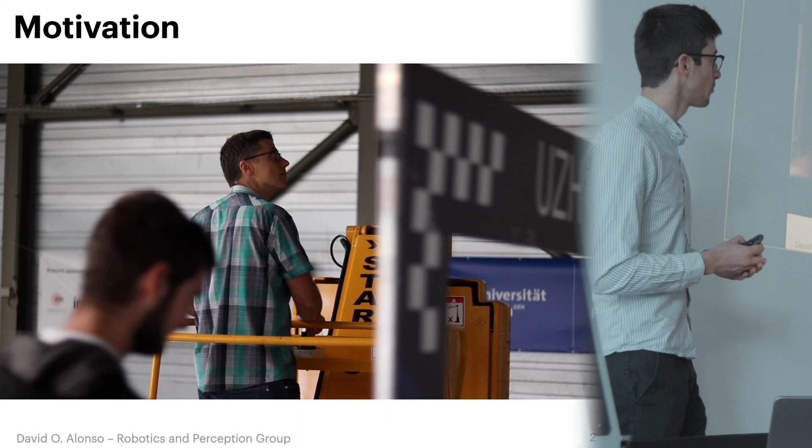Thank you. So yeah, welcome everybody to my presentation on collaborative aerial transport using deep reinforcement learning. So I want to start with a little video. This was a video I recorded about 3 weeks into my project. I had the privilege of going to one of these test days in the flying arena where I saw the policy from Yunlong, the deep reinforcement learning agent, in action against Marvin.

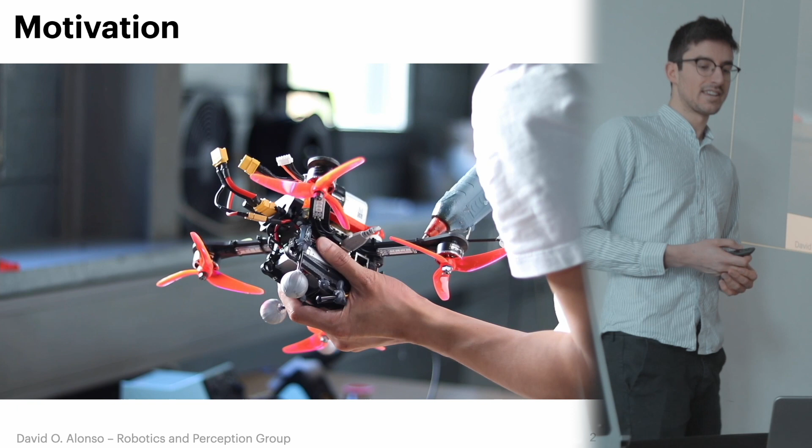And it was really an inspirational moment for me that put a seed into my mind for the vision of my project. And this vision was to take this agility that you see here in this drone, driven by reinforcement learning, and put it into a system where this drone would not only be flying by itself, but it would be collaborating with other drones and carrying a payload.

So you might think that this vision is cool, but what are some other advantages of a team of aerial robots? Well, a team of aerial robots can provide more controllability and maneuverability, so you're able to control the 6 degrees of freedom of a payload with more flexibility and have more configurations. It's also more robust to failure of one of the quadrotors, and it's more efficient.

So if, for instance, you're a delivery company, you don't have to size every flying platform for different types of payload, but you can have a single flying platform and just change the configuration to carry different types of payload with different masses. So these properties are really useful in applications such as delivery, but also search and rescue or construction.

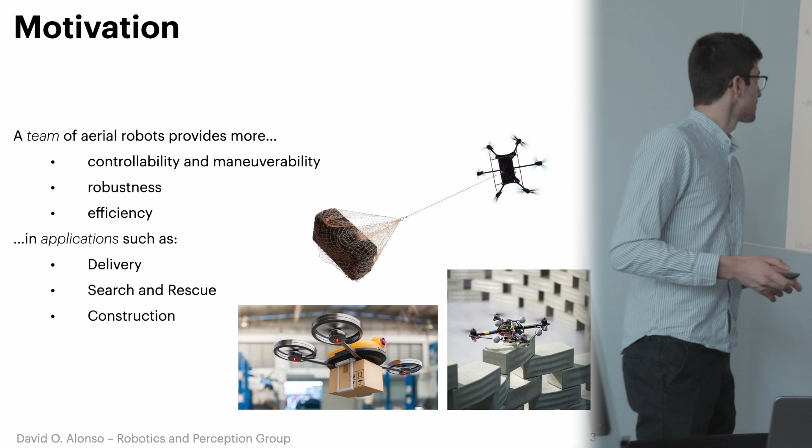But it also comes with some challenges. Collaboration of any kind, such as what you see here in the DARPA challenge, is very challenging. It requires sensor fusion, not only across the sensors within one vehicle, but of sensors across vehicles. It requires communication between either the different agents and a central unit, or between the agents themselves, and coordination as well, so planning for different agents.

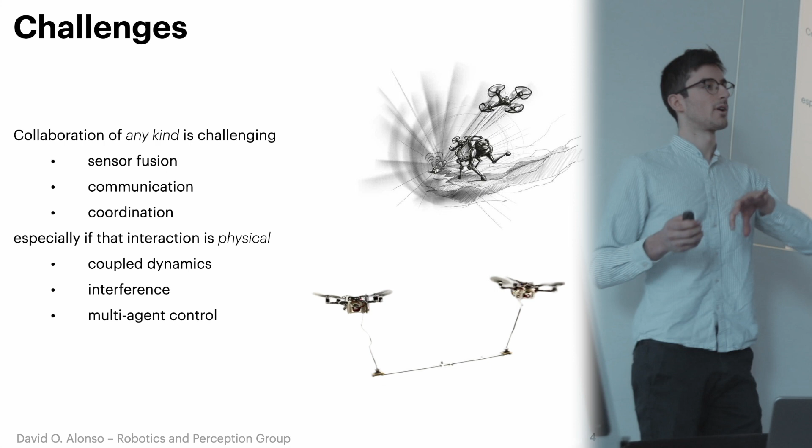And if that interaction is physical, then there are additional challenges, because now the dynamics are coupled between the agents, and the fact that they're in close proximity means that there's likely interference between them, aerodynamic or of other kinds. It also means that you really have to do multi-agent control by being aware of the other agent's presence to, for instance, avoid crashes, and keeping in mind that the actions of one agent directly change the environment of the other agent.

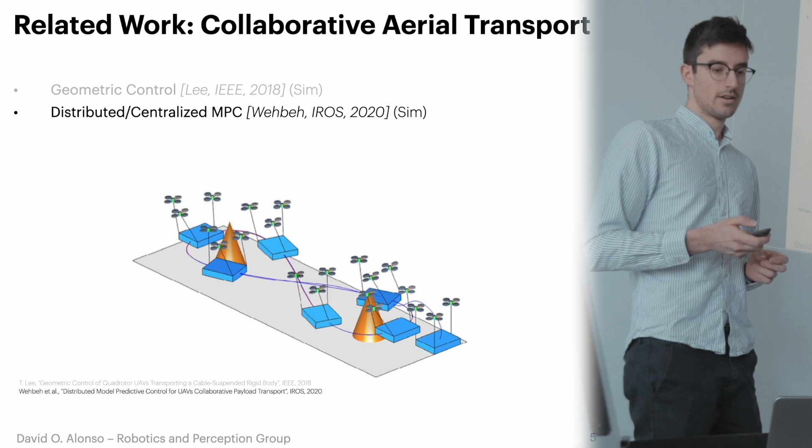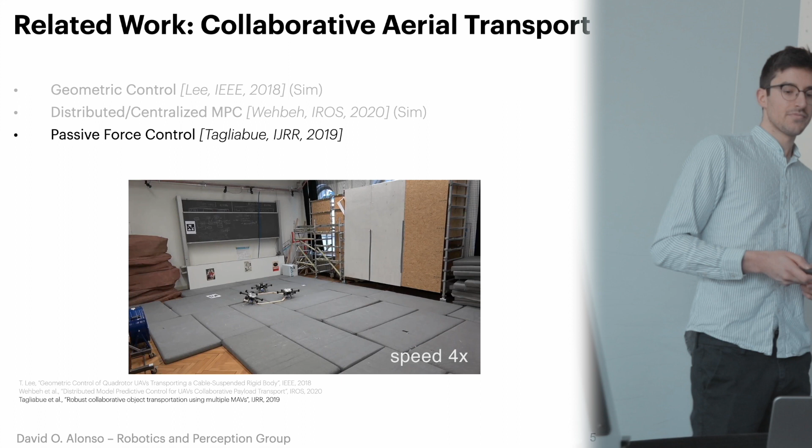So let's look at some related work in the field of collaborative aerial transport. There have been many approaches in the last years trying to tackle this problem. One of them is geometric control, MPC, and both of these methods were tested in simulation. But at ETH there's also been some work on a physical platform using passive force control, where there's a force sensor on the slave, and it's able to follow the plan of the master. And there's been some work in Professor Loianno's group and here at RPG, where instead of a force sensor, there's a vision sensor.

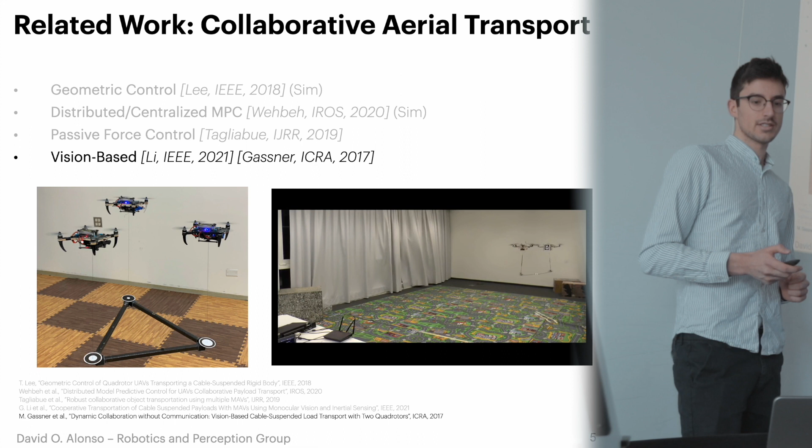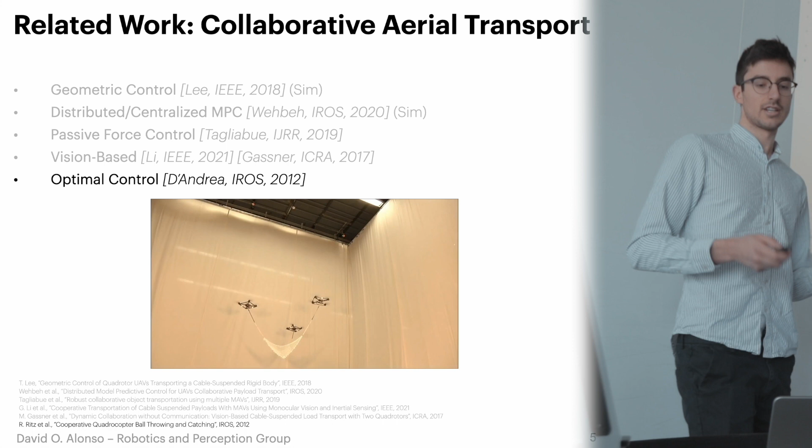The last approach I wanted to touch on is quite an early one, Skynet at the Flying Machine Arena. This was done with optimal control, and out of all the approaches, it showed the most agility. So with all the approaches I've shown, there are some limitations. Either these approaches are not agile, so the top speeds reported are in the range of 1 to 2 meters per second.

Sometimes they're not tested on physical platforms, so a lot of the results reported in this field are just in simulation. And in the case of Skynet, which is agile, it's been tuned for a very specific task. It's basically a discrete set of time ranges where an optimal trajectory has been planned that has to be tracked online.

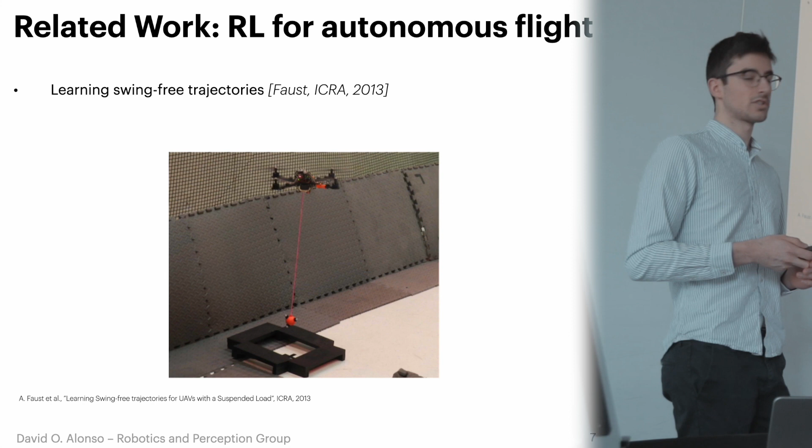So what we wanted to do was address some of these limitations by looking at reinforcement learning as a potential method. Reinforcement learning has been applied quite extensively to flying robots, but I wanted to highlight some work that goes in the direction of collaborative aerial transport. Aleksandra Faust did some work in her PhD on learning swing-free trajectories with Q-learning. There's been some recent work at Levine's lab where they use meta reinforcement learning to learn a changing dynamic model mid-flight.

So in these pictures you can see that as the agent is taking off, the load is basically increasing and it needs to know how to handle that. And of course there's the work in autonomous drone racing in this lab by Yunlong that has really demonstrated the ability of reinforcement learning to be able to learn agile flight.

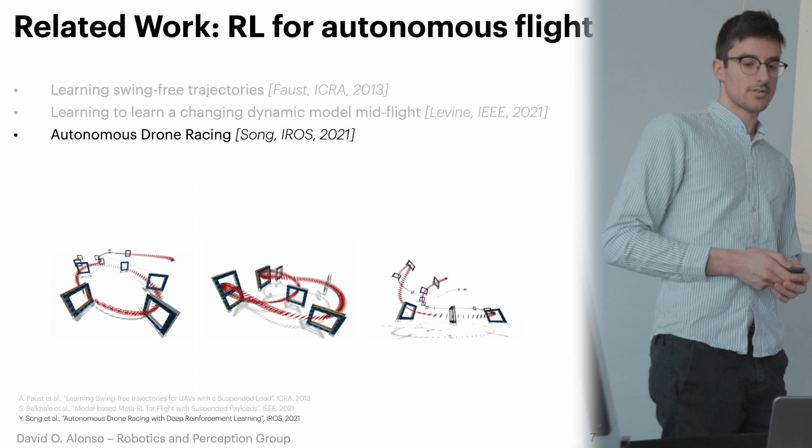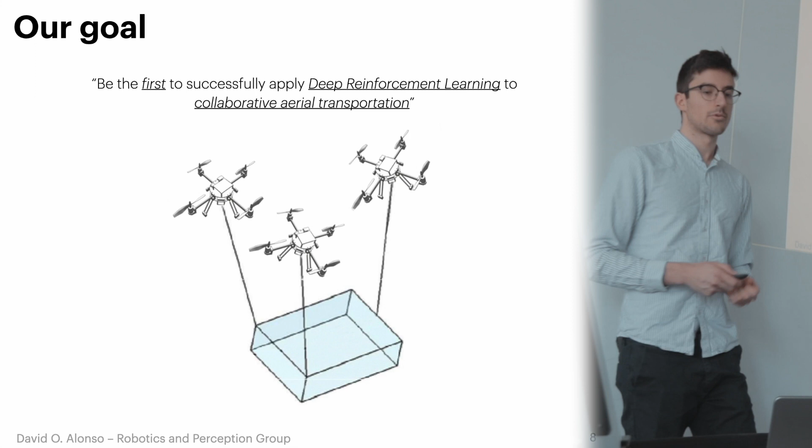So we basically wanted to take this and apply it to collaborative aerial transportation. So our goal would be to be the first to apply deep reinforcement learning to collaborative aerial transportation. So how would we do this? What was our approach? The first step would be to implement a dynamic model from scratch in MATLAB to be able to quickly debug and test it and validate it.

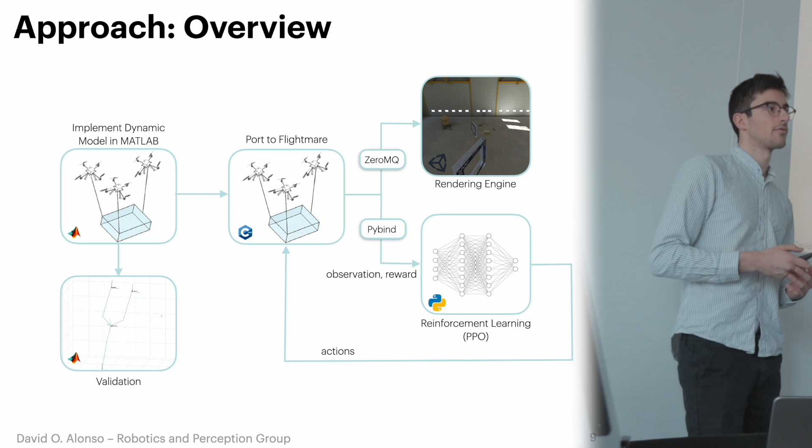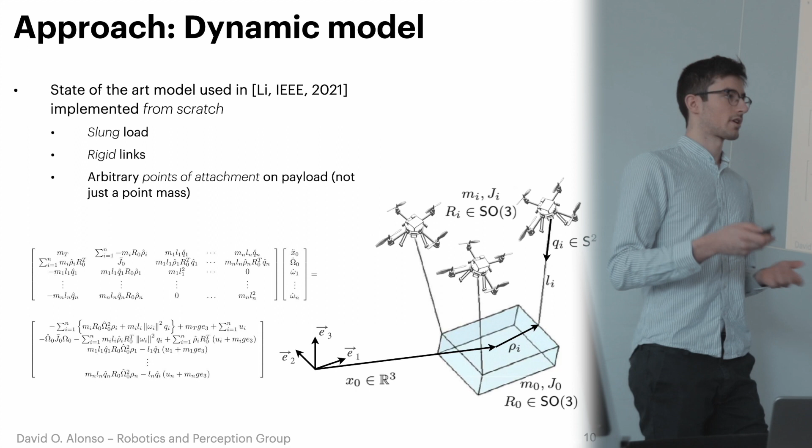Then once that was done, we would port this model to a FlightMare environment in C++, and there we would use the existing framework, this OpenAI Gym-style framework, to train a centralized reinforcement learning policy using PPO. So let's look at the first step in this process, which is to implement the dynamic model. So for this we used a state-of-the-art model that was presented in recent work at Professor Loiano's lab.

We implemented this model from scratch, and some of the properties that I want to highlight of this model are that it's a slung load model, as you can see from the picture. The links are rigid, so they basically keep their length and they can be compressed and in tension. And this also means that there's a kinematic relationship between the payload and the quadrotors.

And it supports arbitrary points of attachment on the payload, so not only a point mass, but any kind of payload shape. And lastly, it also supports an arbitrary number of quadrotors. It doesn't get harder to implement, it's just a parameter that can be changed, which increases the dimensionality of the state, but it's easy to support that.

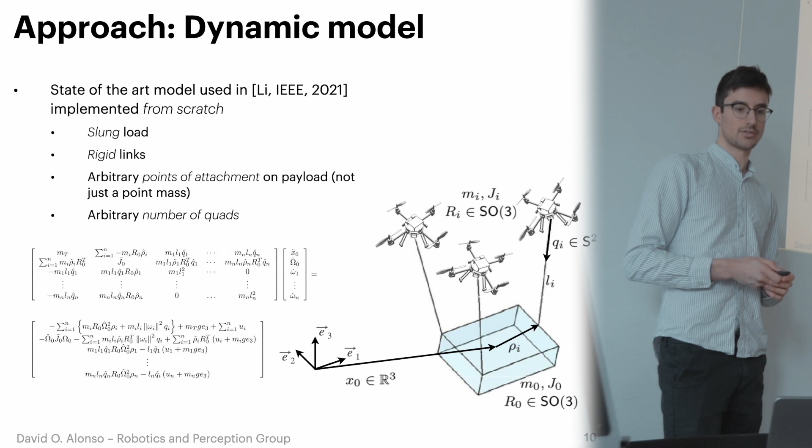and the output is basically a stack of actions for each quadrotor. So the size is 4 times the number of quadrotors, and it's a thrust rate. So you control the body rates and the collective thrust. So how are we going to learn to hover, which is going to be the first warm-up task to see if this actually works. For this, we selected the following observations.

And for the reward, we have a goal state, which could be bringing the system at rest, but at a given position for the payload. So the payload should go to coordinate 0, 0, and height of 5. And then we take the difference between the current state and the goal state. We take the norm of that for each of these individual features, so position, velocity, orientation, body rate, and linear velocity. And then we use a negative exponential as the reward. And then this, as I said, stays the same.

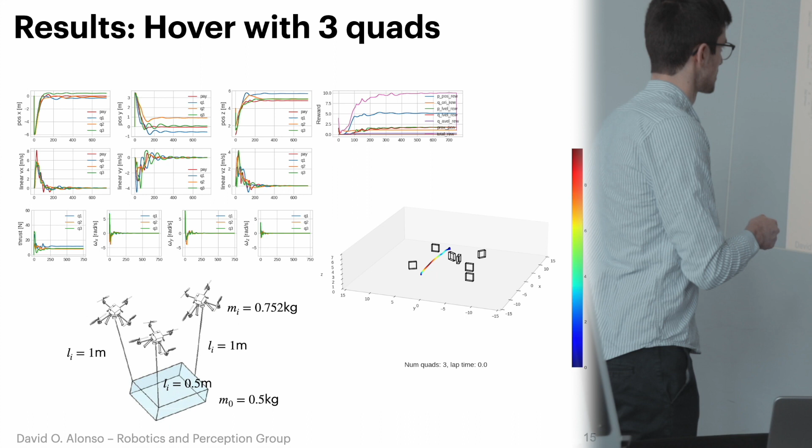Now we extend this, we make this a bit harder. We extend the observation space to 3 plus 15 times 3, so 48, because we have 3 quadrotors, and the action space is 4 times 3, so 12. And we see that it can still manage to perform the task. So we see that the payload is this red line, and it's going close to the desired goal state, and it's at rest. And this video will also show you what's happening.

There's something interesting here, which is that, at least when I saw this for the first time, the configuration isn't what you would expect it to be. But this again can be brought back to the rewards that you're giving to the agent. There's no reward that is linked to the thrust on the quadrotor.

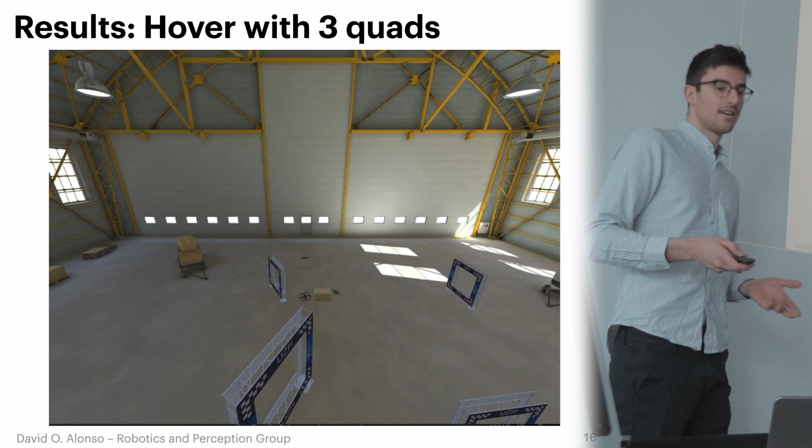So in this case, it's basically learning that one of the quadrotors is taking most of the mass of the payload, and the other ones are basically just hovering next to it. And yeah, it's a valid solution.

Okay, so now we got very promising results in this hover task. So we thought, how can we really push the system here to the next level and give it an even more complex task? So we thought, what if we tried to race with the payload through the gates and let the quadrotors figure out how to control the payload?

So in this case, when we want to do racing, the observations we're giving are the relative distance between the payload position and each of the gate corners of the next gate, the linear velocity of the payload, and for each quadrotor, the orientation, the linear velocity, and the direction of each link.

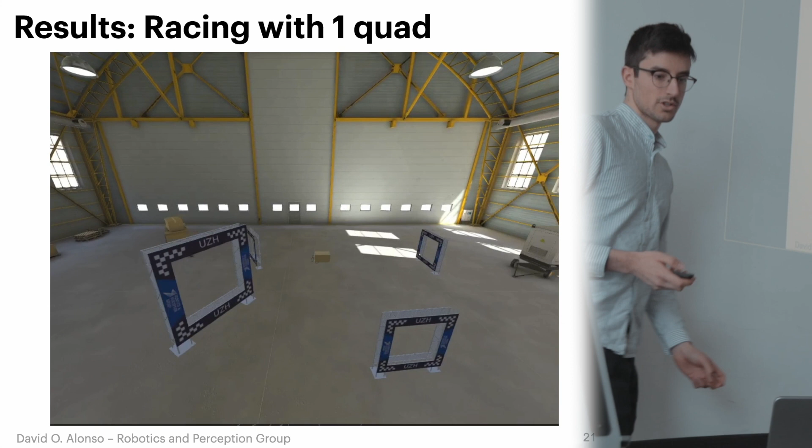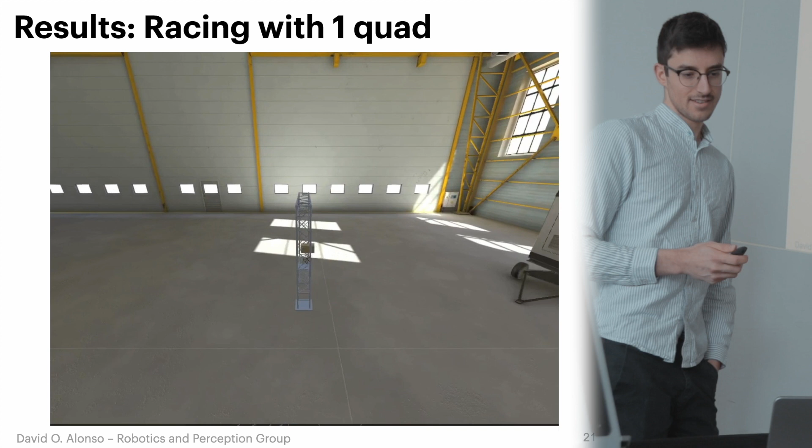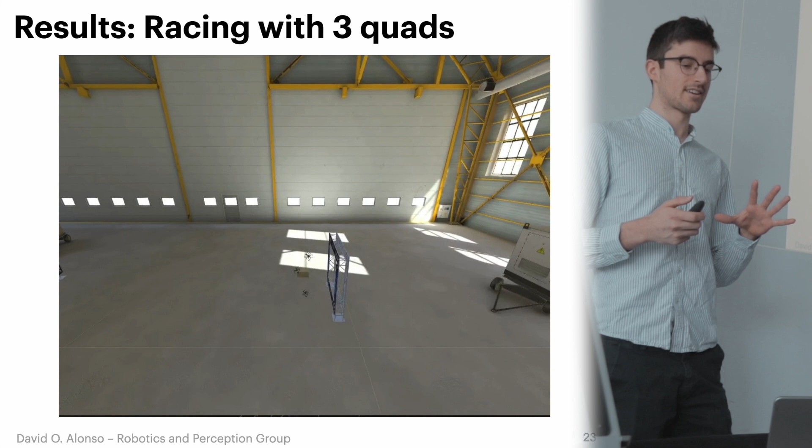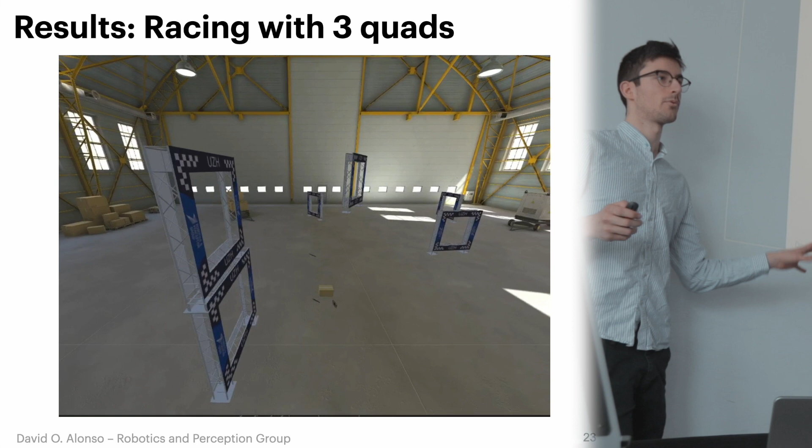So again, the links of the model are rigid, which is what gives it a slightly unrealistic look, because the payload can be pushed from behind, essentially. And there's also no limits on if the quadrotors go against the links or anything. So they're really free to collide with anything. The only collisions that are counted are the payload with the gates or with the ground or the walls.

So, let's look at what we've achieved, first of all. We've taken a step towards agile collaborative flight, and we've shown that deep reinforcement learning has potential in this field. And aside from that, we've built a Flightmare environment for training collaborative agents carrying a payload, which can be used to do a vast number of other tasks.

And of course, this being the first step in this direction, we have a lot of limitations. First of all, we have a centralized policy. So this means that you need some form of communication of either all the drones with a central unit that's going to gather all the states necessary for the observations and then send the actions to the drones, or you need the drones to communicate with each other their internal states, so that they can all run this policy on board.

The dynamic model that we initially implemented was from another paper, and most of these papers have not tested anything at high speeds or in aggressive flight. So this model actually is not really suited for high speeds. It doesn't have aerodynamics, and the quadrotor model that it's using is not really a quadrotor model. It's just a rigid body with thrust.

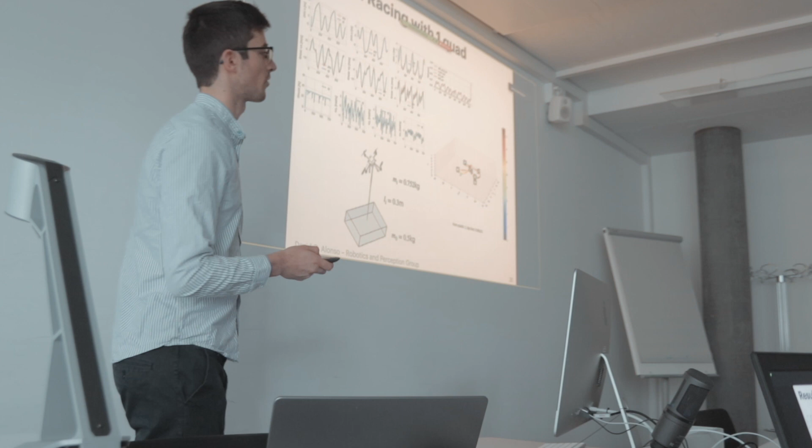Can you show again the objective function? Yeah. So for racing or for? For racing. Wait. This. So what are you trying to optimize? We're trying to maximize the gate progress. The gate progress of what? Of the center of mass of the payload. Yes, exactly. And also there are some sparse penalties that I haven't added here, which are linked to collisions. So you also don't want to collide with the gates or the ground.

None of the quadrotors, none of the payload? No, so only the payload. So the quadrotors are allowed to actually collide and pass through all the gates, and the wires? Yes. That's another thing that would have to be addressed. So the gates are basically kind of virtual. Yes. I see, okay.

And then gate passing error as well? You mean that safety reward? Yeah. No, that's also not added here. But you want to pass through the center of the gate as much as possible, no? No, that's not. Just maximize the progress, that's it. Of course, that's probably one of the next steps you would do to be more robust. So what are then the rewards, if it's only one reward?

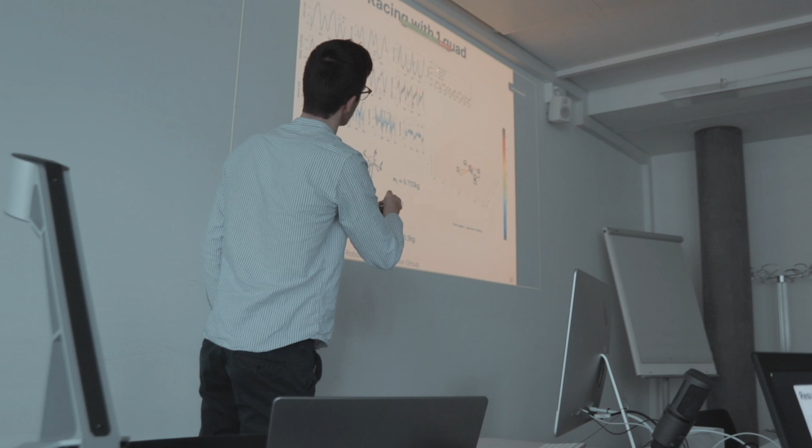It's really just this. I also added a body rate at the start of training at some point, to minimize any crazy behavior on the quadrotors, but I didn't see that it made a huge difference. And actually, here you can see that the body rate, the quadrotor angular velocity reward, is here, but it's at 0. So at the beginning you added this, but then you removed it? I tried it with, and I saw that it didn't make a difference.

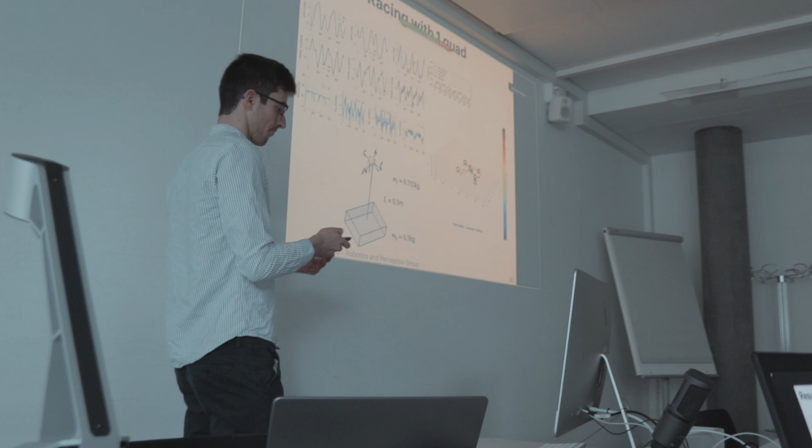Can you go back? But then what are the other 3 rewards? Position, velocity, what is it? Position. So this part is basically the current gate distance, the difference between the payload position and the gate center position. So there is, I asked you about it, you said no. Okay, yeah, it's the progress towards the center of the gate, so sorry, yes, then it does want to go through the center.

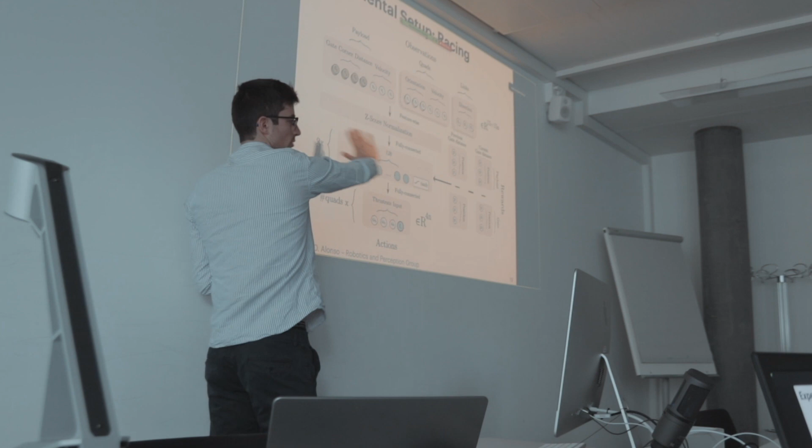Can you be more specific? What happens if you are not close to the center? How close do you need to be to the center to be considered a positive reward? Okay, so the safety reward, I think you're referring to the one in the paper by Yulong for autonomous racing, with a gradient map where the closer you were to the center, it would give you an explicit reward. But here there's none. It's really just this.

So the closer you are to the center of the gate with respect to the last time step, the higher the reward. And then once you pass the gate, it's all with respect to the next gate. So there is a gate passing reward. Yeah. I mean, you listed that, right? Yeah. Good. Thanks.

Go ahead. Sorry, so you don't model any downwash, right? No. Okay. But with the case with the single attachment point, with the single drone, do you think it would work in reality? You mean this? Yes. I mean, there's many inaccuracies in the dynamic model, and aerodynamics is one of them. But I don't think that when implementing this in the real world, downwash would be the biggest problem, because we'd probably have a system where the payload is relatively small. So it wouldn't be this big of a box with this big of a surface area, so the downwash would probably not have that big of an impact.

But you model the rotations of the box, right? Yeah. Have you tried to add some noise to that? So we've added noises, and we've randomized the initial states when we reset the environment, but we have not added noise to the observations. This was really the first step, and we wanted to know if it would work in the best of scenarios. The next step would be to make it harder by doing these kinds of things. Okay. And then there are spherical joints both on the quad side and... Yes, exactly. Spherical joint here and spherical joint here on the center of mass. Okay, thank you.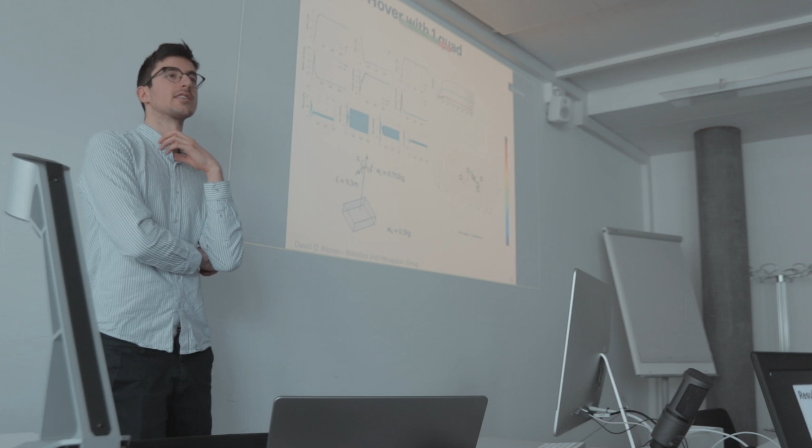So what kind of range are you talking about? Okay, so for your case, the boxes are going to be between 0.1 and 0.5 kilograms, but you don't know. But can you train using that knowledge of the range of masses it should be able to handle? Yes, you can. Then you would try during training to randomize the payload in the range of allowed masses, and then it would figure out a way of dealing with that, I assume.

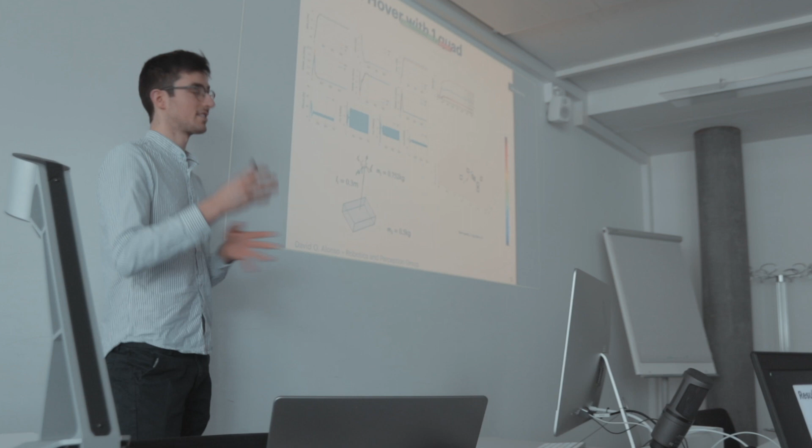But to your other question, decentralizing the policy, that's probably one of the biggest challenges, because the observations would have to be only onboard observations, so states that can be inferred on board. And you would have to use an approach similar to what was done here at the lab, or by Professor Loianno's group, where you use sensors on board, like vision sensors or force sensors, to estimate things like the tension on the cable or the direction of the cable, and the position of the quadrotor with respect to the payload. If you put, for instance, an AprilTag on the payload and you have a downward facing camera, you could get something.

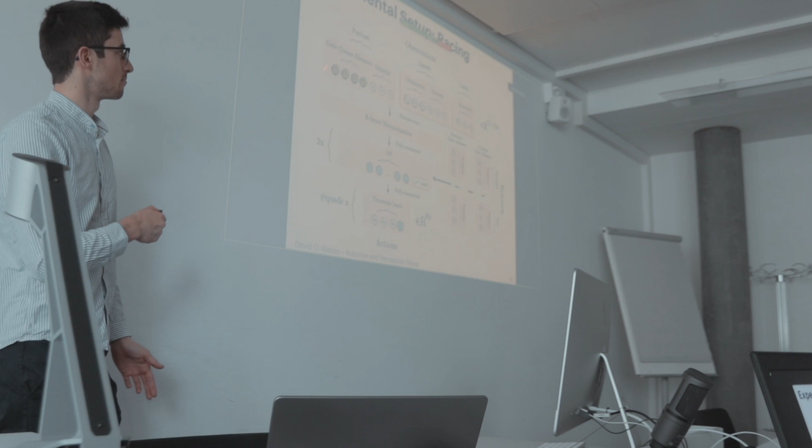Your goal is essentially to get something close to this observation, but from only onboard sensors. But again, there's many things that I haven't tried here. So the next step would also be to see how small I can make this observation vector so that I can still race.

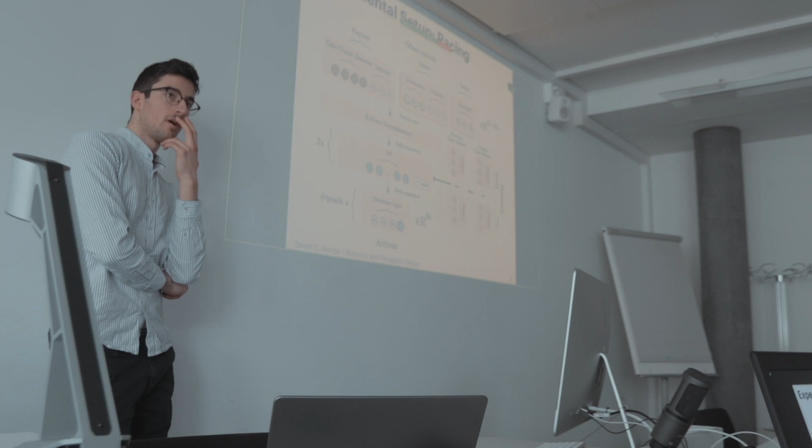Exactly, but it seems you dodged the question a bit. My question wasn't about centralized or not centralized. You mentioned you could randomize the payload at training time and the policy would figure it out. So how do you think the policy would behave if you start randomizing the payload without changing anything about the observation? Do you think this would work out of the box? Yeah, I think it would work, but you would have lower performance on average.

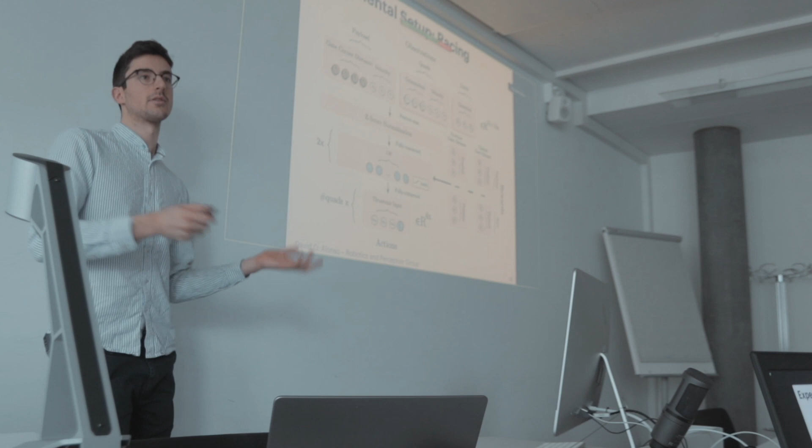So it's similar to what Yunlong had when he tried to randomize the gates, where he wanted to be able to race on any random track, and there he observed that the average lap time would get worse quite a lot, but it would still be able to handle a higher number of racetracks and not crash. But I have not tried this on a dynamical property.

I think an important thing would be that the policy can somehow figure out how heavy that box is, and I think the key to unlock this would be to have a stack of observations. Do you mean the observations having some memory? Yes, exactly. Okay. Thanks.